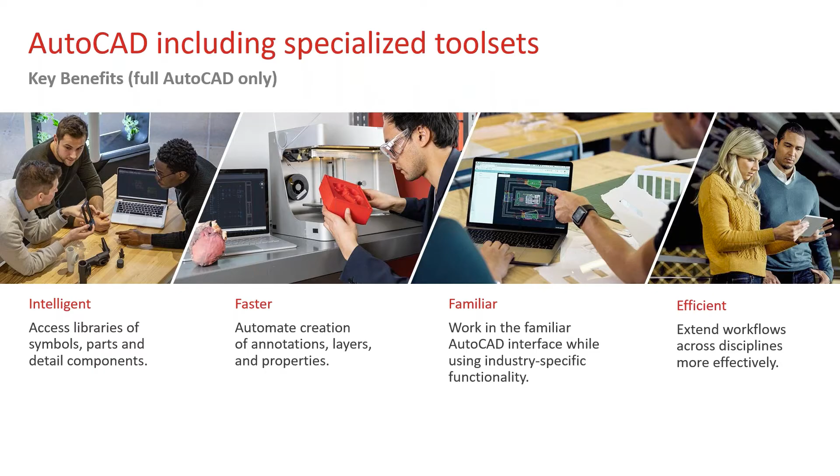You still get all of the usual subscription benefits. So you subscribe to AutoCAD and obviously AutoCAD LT, and you would get all of this for your flexibility and support. So you get the technical support, so you can talk to support specialists, get remote assistance, online resources as well. The software stays up to date on your subscription, so you get instant access to the latest features, any upgrades to new versions, and so on.

One of the major benefits of the subscription is the flexible term lengths. So you can use the software for as long as you need it. You might have a specific project that needs the mechanical toolset. You can use it for as long as you want to with your subscription, so you can go from 1 month up to multiple years in that specific subscription if you need to. And of course, you've got the admin tools there as well.

So you can manage all your software licenses, your seats, your usage. As an ex-CAD manager, I wish I had the administrative tools that we have now, because it would have made my life probably about 200 times easier. But that's me going back and showing my age a little bit there. But the technology now with the administrative tools is just so much easier to use. It's really easy to manage those software licenses.

Now, we're talking about the mechanical toolset today. We did a productivity study a little while ago about productivity gains in the mechanical toolset. Now, you'll notice there's a little asterisk right there after toolset in the slide. If you look down at the little caveat at the bottom, that's compared to basic AutoCAD. So we're getting a 55% gain over basic AutoCAD.

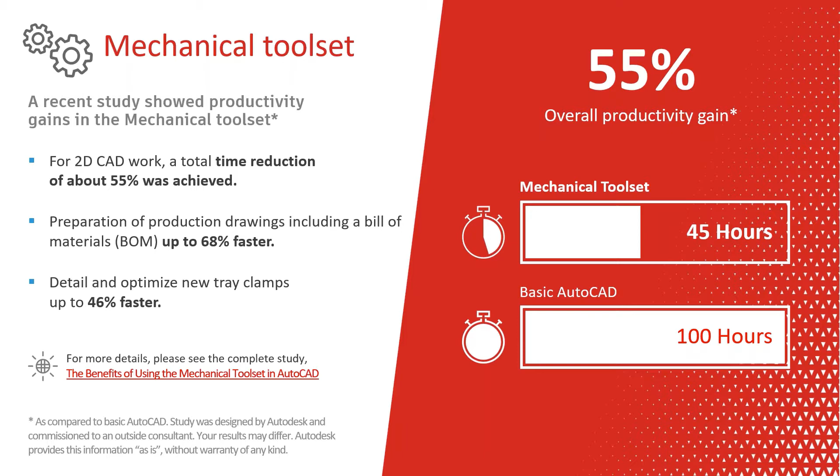So again, I'm talking about the caveat there. If you were doing something a lot more detailed, you might get a better or lesser productivity gain, depending on the actual subject matter that you're working with. So just be aware of that. We're saying it's an overall productivity gain of 55%, and that may differ depending on what you're doing.

Also, preparing production drawings for assembly, you want to make sure that you've got a parts list, a bill of materials, so that when they go out to assembly, everybody's got everything to build what they need to build. We're also going to look a little bit at how we communicate design intent with our production drawings. The one thing that we are aiming to do here with the mechanical toolset is communicate that design intent. So when it leaves our CAD office and goes out to the people that are going to manufacture our design, they know what to do with it when they put it into production.

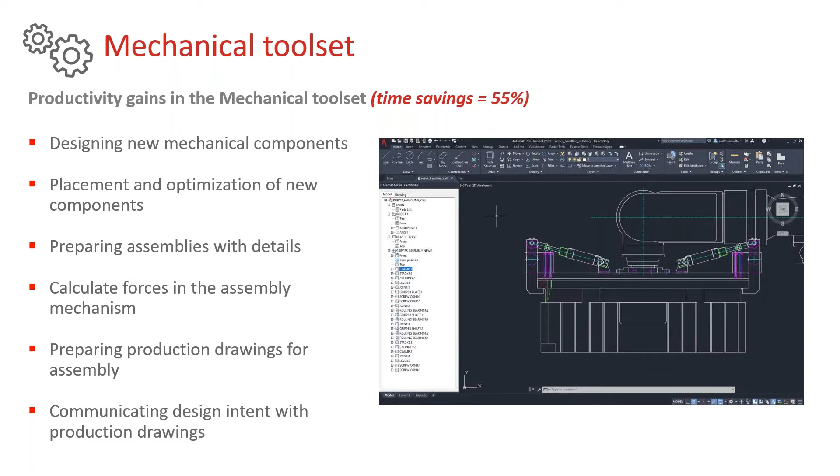So let's get going now. Let's move into what we're going to talk about. And the first thing we're going to look at is designing new mechanical components. Now, the time saving for that was approximately 45% in the productivity study.

I'm using a slightly different drawing; it's different to the one that we use in the productivity study. It's a little pump subassembly, and I really like this one because it gives you a good general overview of the mechanical toolset. Now, when you're using layers and properties in basic AutoCAD, it's not a difficult task, but there's lots of little manual things that you've got to do, and they can become quite onerous, but more importantly, time consuming. So what we want to think about here is, how does the mechanical toolset actually speed us up, so to speak? Now, these little videos, they're pre-recorded, so I'll just talk you through what's going on.

So we'll start the video off now, and you can see we've got the sub-assembly there, and I'm just moving over now. We've got the mechanical browser. Now, the lovely thing about the mechanical browser, it's a palette. You can auto hide it on the screen if you need to. And the nice thing about it is it lists all the parts that are in your sub-assembly, in this case, the little pump sub-assembly. And the benefit you have there is all these parts are stored in a content library.

And when you're working with the layers, it's a very different layer manager. You'll notice in the layer manager there, we've got different colors, different line types that are specific to the standard that we're using. We've also got, if I slide along there, associated objects. And you'll notice the mention of the word contour in places there. Contours are used in the mechanical toolset, and what they do is you'll pick something like a hidden narrow line type or a center line, and it will automatically place it on a known layer. And that's the major benefit of these contours, it automates those layers for you. And that means that you don't have to think about it. You know it's going on the right layer straight away.

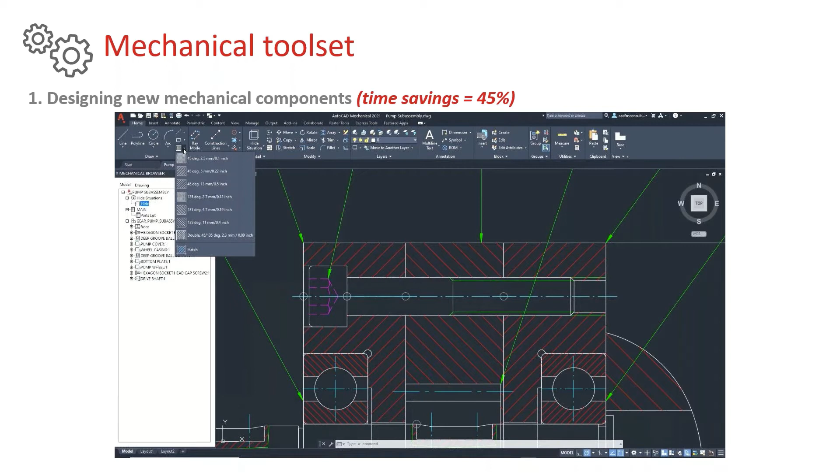In the annotation here as well, you'll notice in the text, based on the standard we're using, we've got different multi-line text at different heights. So I don't have to go in and set the height or set the text style height at all. I can automate that, and I can say that I want it that height. If I go back to the Home tab, hatching is similar. I've got different hatch patterns preset already with my standards that are driven in the mechanical toolset drawing. I can still hatch normally though. You'll notice there I can still pick an internal point and hatch if I want to. Nothing to stop me doing that whatsoever. So the whole idea there is that all of this detail is quick and easy to work with. And it's just a great tool.

And I love the mechanical toolset because there's so many things in here, like center lines. You can have center lines in so many different configurations. You don't get that in regular AutoCAD, but I wish it was there. It would make my life so much easier in regular AutoCAD if I had all these different center line configurations to use, especially when you're drafting simple things up and you need a center line cross in the corner of a polyline, for example.

Other things available as well are your construction lines. Your construction lines are fantastic. You've got so many different types. In regular AutoCAD, you've got 3. So you can see the difference there in the mechanical toolset. And they're brilliant for transposing different views. At the moment, we're looking at a side view of the subassembly, and I've got all those different construction lines there that allow me to create contours and construction lines to develop different views of the subassembly that I'm working on. I can delete them all as well, you'll notice there, and there's some extra ones if I go to the flyout there on the construction panel as well.

Now, you've got your hidden lines as well. There's all different hidden lines that have numerous configurations in there as well, and allow for different scales and proportions when you're detailing in the mechanical toolset. And you'll notice there we've got the bill of materials and we've got the little green balloons there. Those balloons are a standard revision, you'll notice there. They work to a specific standard. So the diameter of the bubble, for example, is a specific size. The arrowhead is a specific size, and it does all of that automatically on the appropriate layer for you at any given time. So you don't have to think about which layer does that go on? What diameter does that bubble need to be?

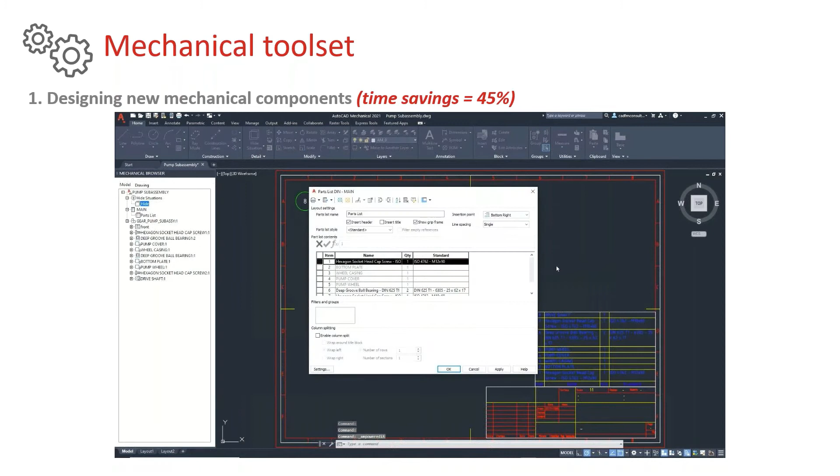You don't have to think about it. And you've got your parts list there as well. That is automatically added when you work from the bill of materials. So there's my parts list, and I can go in and edit that, edit the configuration of the parts list. I can also go in there very quickly and just quickly edit the attributes of my title block. Again, that's all attribute driven.

So you can see there I've got a standard DIN title block, and you can see I can go through all my tags there, my attribute tags, and make sure that I'm communicating the appropriate information on the drawing. It's that quick and it's that easy. And this is what I love about the mechanical toolset. It's taking all of that donkey work out of the drafting and allowing you to concentrate on the design.

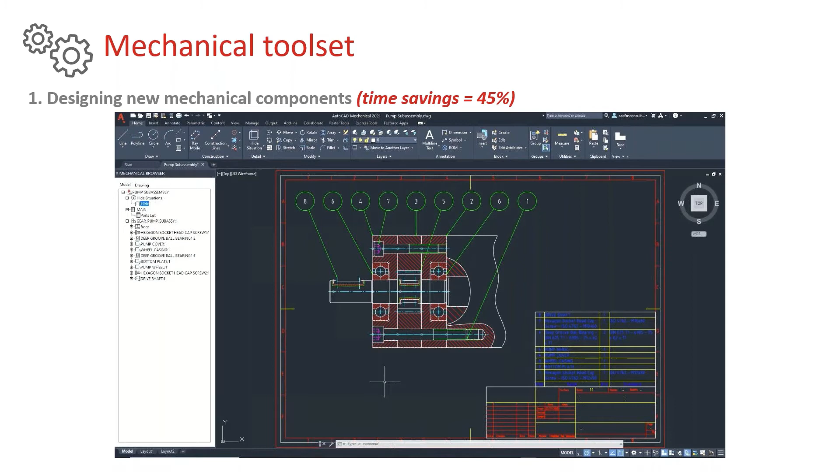Okay, moving right along now, what we'll do is we'll jump into how we detail and optimize new components. So we've got lots of different commands that allow us to enhance the basic AutoCAD drafting. So on one hand, you're saving time here, but on the other hand, you have easier access to commands now that you might not know about.

So you've signed up to your AutoCAD subscription and you've loaded up the mechanical toolset, but you're used to regular AutoCAD. So when you jump into the mechanical toolset, you might find commands that allow you to work much smarter, much more efficiently. So there's numerous options for line, centerline, and rectangle creation, for example. So let's run the video and we'll jump into some of these now. And the whole idea of these is it gives you the ability to work in the toolset quicker and faster.

And I'm hoping that my crosshair will move soon. There we go, that's excellent.

So if we jump into the line command there, you'll notice you haven't just got the line command anymore. You've got symmetrical line, zigzag line. Zigzag line is great for breaks in a design. Different center lines that I mentioned earlier. Now, you'll notice that there's lots of different ones in there, but if I'm designing those 4 holes on that pump assembly there, I can actually place those 4 hole center lines just in one go, instead of having to draft them all up.

The rectangles, though, I love. I've got so many different configurations of rectangles I can work with. I can decide on what size I want it to be, where the midpoint is. I can do the same with squares as well. So they're equal-sided rectangles, you might say. So the tools there are so quick and easy to use.

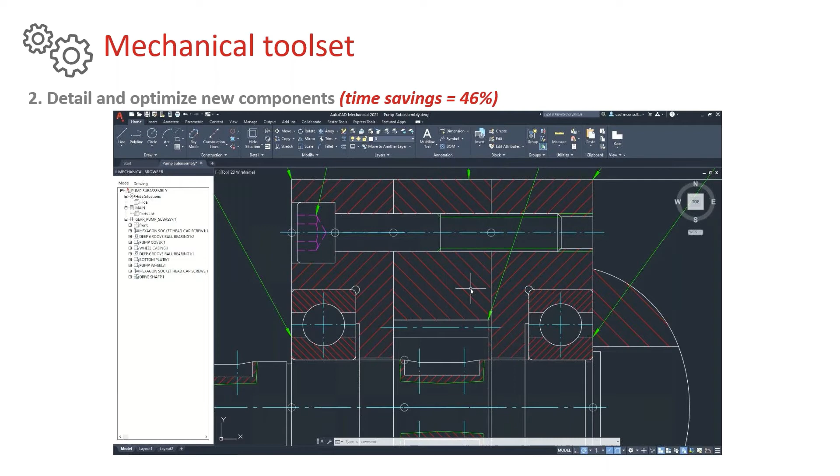Now, you've got some nice tools here when you're dimensioning as well, your annotation. One of my absolute favorites is the power dimensioning in the mechanical toolset. So if we jump into that a moment, and I'll specify my origins like you would for any regular dimension, and I'll just click there. And as soon as I click, it doesn't just place the dimension. It places the dimension as if I'm going to be using the DDEDIT command. So I can go in there, I can edit, I can take away the actual dimension value, or perhaps add my own information as well.

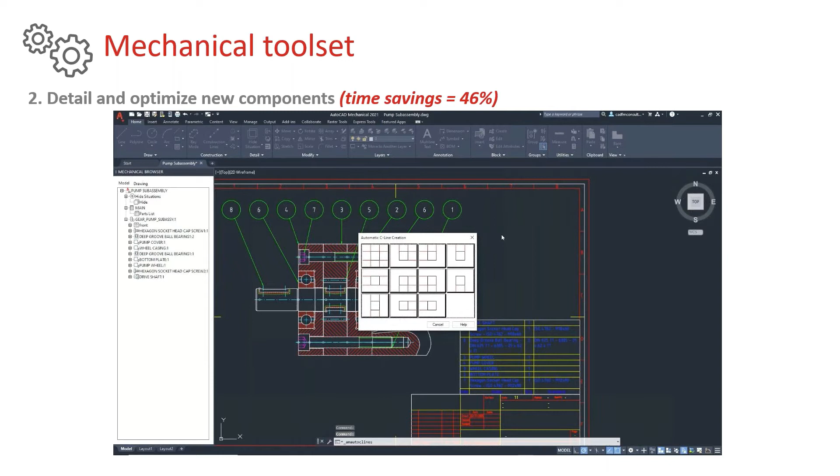Now, I did mention about construction lines as well. Construction lines are amazing as well. Now, we've only got the one view here on the drawing, but we might want to edit this and expand and have some different views of the pump subassembly. So you've got automatic construction line creation based on a specific configuration.

So I'll pick those 2 lines there and quick enter after selecting them. And there's my construction lines in place straight away. So I can place that view over there to the right, maybe use a bigger title block and expand my drawing as well.

So it's just incredibly easy, really fast and quick to use. Now, I want to show you the hatching as well. The hatching's really clever because I can pick just a standard hatch pattern. Now, I'm going to show you a really good mistake that people often make. Make sure that your hatch boundary is closed before you hatch. Otherwise, you get that kind of issue.

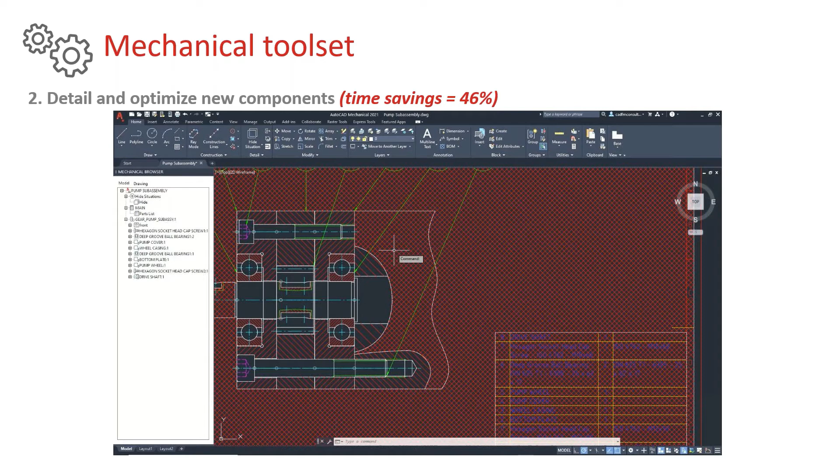But the hatch pattern there was preset, so it was all the right size on the drawing. If I come in here, though, let's perhaps hatch that area. And again, the hatch pattern is the right size, the right angle. It's automated. I don't have to think about it in my hatch command. It's already there and ready to go because I've got a standards-based list of hatch patterns to use. So really quick and easy.

And to optimize your design, you then don't have to think about all of those variables behind, say, your hatch pattern, your dimensioning, your construction lines, and so on.

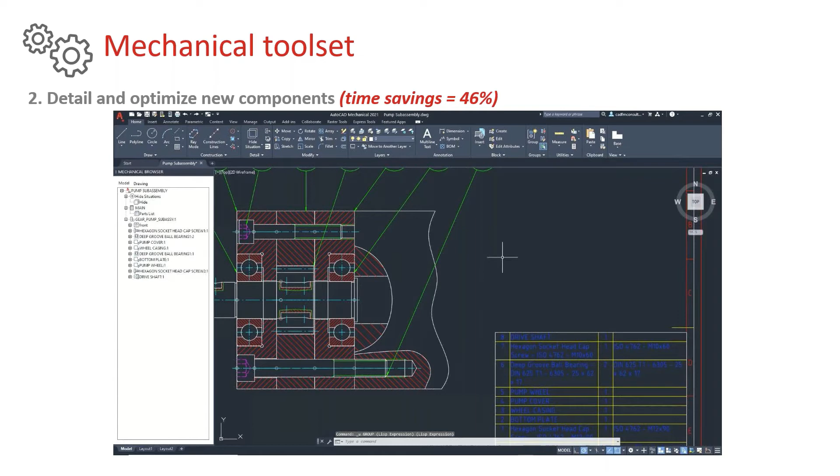We're now moving into the 3rd video of the series in this webinar, and we're going to take a look at preparing our assembly with detail views. And you can see there's a fairly significant time saving there of 86%. Now again, remember that caveat, it might not be exactly 86% when you do it. It might be more or less depending on the complexity of your design in the mechanical toolset.

Now we're going to be working with the robot handling cell with the robot arms again. And what we're going to look at is how we set up detail views that have different properties. We're talking hidden detail, solid lines, line types, etc. Now, in basic AutoCAD, there's a lot of manual work for that, and geometry manipulation is needed to accurately represent the objects that are partially or completely hidden.

So you have to create separate views of, say, hidden detail and maybe not hidden detail, just to make it really simplistic. But the benefit you've got with the mechanical toolset is you don't have to do that. Obviously, when you're doing this in basic AutoCAD, it's really time intensive and tedious, and it reduces any time available for mechanical design. And I've been there when I want to hit a deadline, having to create different views in basic AutoCAD.

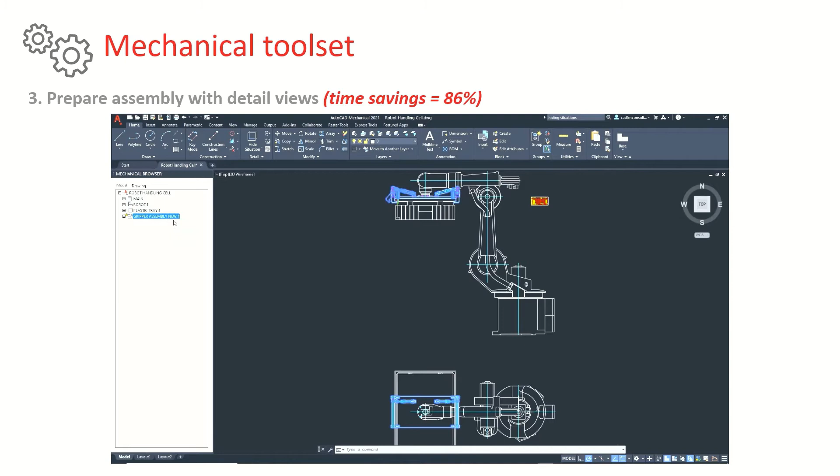So how does that work in the mechanical toolset? Well, let's zoom in and have a look now. I'm looking at the gripper assembly part of the robot arm. So we're going to zoom in. You can see the box there with the vertical lines, and the robot arms are clamped in, holding that box up at the moment with the clamps.

Now, what you create in your mechanical design in the mechanical toolset is what they call a hide situation. And the hide situation basically has different properties. So you go to hide there, it's in the detail panel on the home tab on the ribbon, and you create a new hide situation with your hidden detail, your center lines, your continuous lines to represent the view at the front, so to speak. But if you want a view at the back, you can go in and work with these details and give them different properties. So you might have dashed lines to represent hidden detail instead, for example.

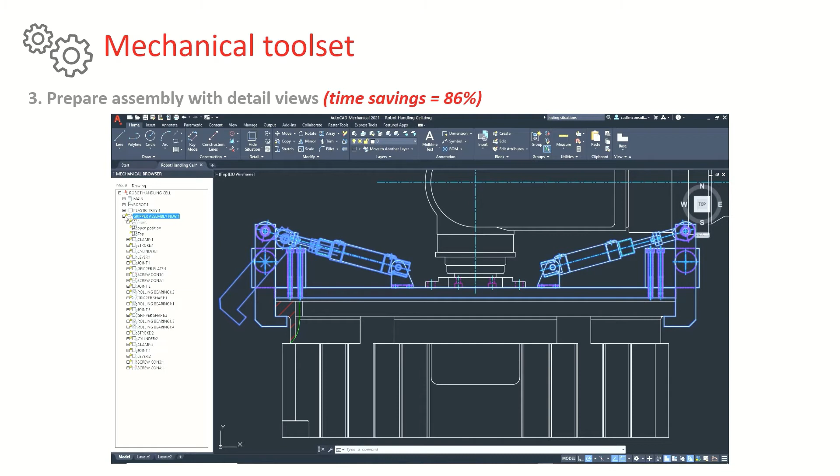Now, what I'm going to do here is go into two of the hide situations I've created for you. So we're in the gripper assembly, which is highlighting in the mechanical browser there. I'm just going to expand that out and look at the front view. And you can see I've got some hide situations there. I've got two, and it's basically the left-hand robot arm and the right-hand robot arm. And I've set those up and they're really basic and simple.

But I'm going to use the edit tool to edit the hide situation so that I can show you the difference between a hide situation and a regular. So it's sort of front and back. It's a bit like draw order in other Windows-based applications. So there's one there. And you can see the hide situation automatically puts that to hidden detail. If I go to the next one, again, you can see another hide situation, and you can see I've created some different ones there just around the robot arms in the gripper assembly in the design.

And the whole idea of these hide situations is it allows you to highlight elements in the drawing itself. So I go to the hide situation, I right click on it and I highlight, and there you go, it highlights it in that view.

Now the benefit I've got there is if I want that view to be part of a scaled viewport to communicate my design intent in a drawing, I can utilize that. And again, I can highlight again, and you can see the hidden detail just pops up. And what it does is it's two different views of the same object, but you're looking at them in different locations, sort of front and back, or one at the front and one behind it.

And that's why these hide situations are so useful, because it basically allows you to not have to do all that work that you might do in basic AutoCAD. You can see there that I'd have to create two separate views, one with hidden detail and one without, in basic AutoCAD. But as you can see with the hide situations in the mechanical toolset, it automatically highlights those two different views.

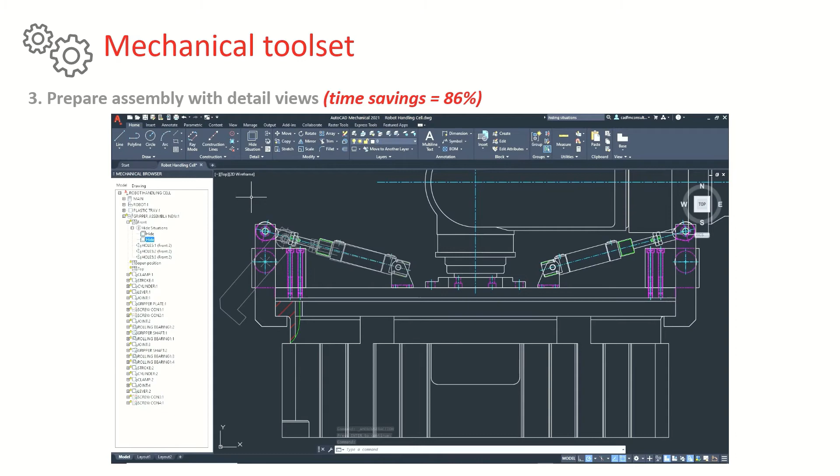So this is another really fantastic tool in the mechanical toolset. It allows you to calculate the forces in the mechanism itself. And we're going to zoom in on an area in the drawing where we can actually calculate some forces. Now, there's a little hatched area in the top view of your robot arm. You can't see it at the moment, but hopefully we'll zoom in shortly. But the idea is we're going to jump into this robot handling cell and make sure that we calculate our FEA, our finite element analysis.

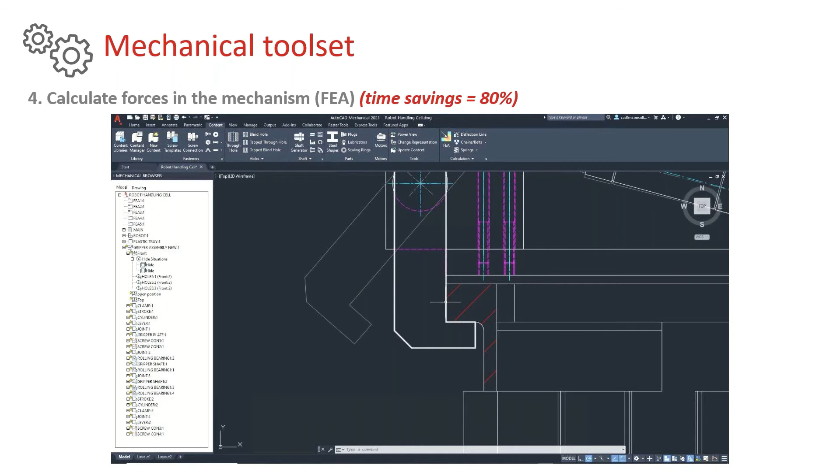So when we zoom in, we're going to get in nice and close, and it's that little hatched area there. And we need to zoom in a lot here because this is quite a small part of the design. But I jump to the content tab and I can run there my finite element analysis. And what it asks me now is where am I going to highlight to calculate? So I pick a point, a bit like if I'm hatching, and then I get the calculation dialog box up here. Now I've got to add my loads, I've got to add my supports here.

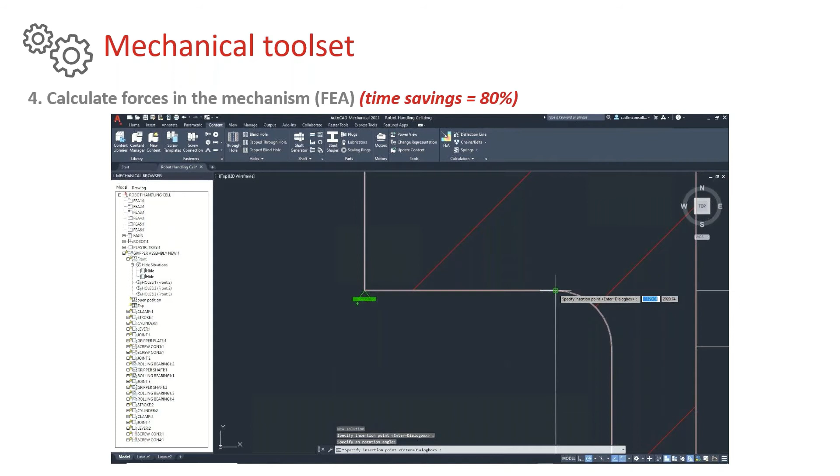Now, some of the values I add, just ignore them because I'm just showing you the workflow here. They wouldn't really apply in real life. So there's one of our supports, supporting that little edge that's bending round at the top of our mechanical design. And I'm going to place another support there. So this is sort of a lip coming off of the edge of part of the robot clamp that we've got.

So what I need to think about now is where is there going to be a load bearing down on those supports? So I'm going to place a load, and again, a little bit of zooming and panning. Just going to place a load on that corner there as if it's pushing down on the top edge of our little robot clamp that is working with our robot handling cell. It's like a crane that lifts boxes. So there's a load there, and I'm just pushing it straight down, and it's 1,000 newtons I've put in there. Now that value might be totally random. It might not actually work.

Now, bear in mind we're a 2D drawing, so we need to give it a thickness of material to calculate with. So I've put 25 millimeters in there for now. And I'm going to click on the visual results. There's all different results you can get, but if I click on the visual results there, I can have something like a von Mises stress diagram. Now, you may remember those with all the nice pretty colors. You can also have lines, so you can choose which one you want. I like the colorful one.

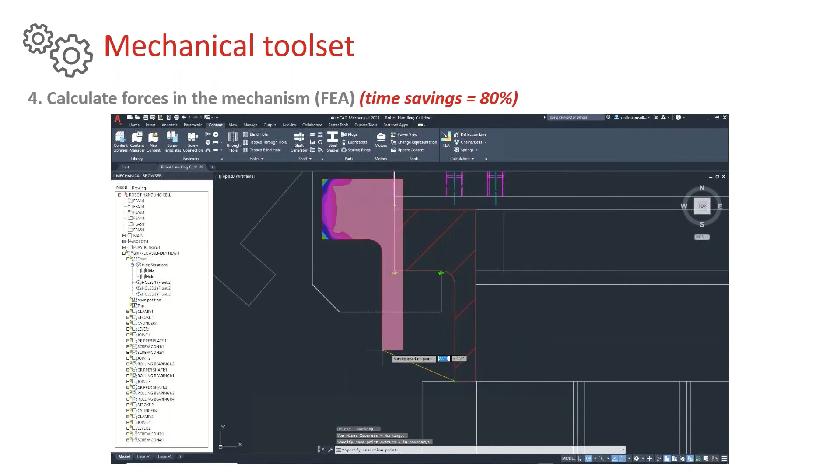And it calculates it for me. So all those different colors now represent the stresses and strains on that particular part of my robot handling cell. I can now drag that away from the design, click in an area of the drawing, put my legend there as well, click again.

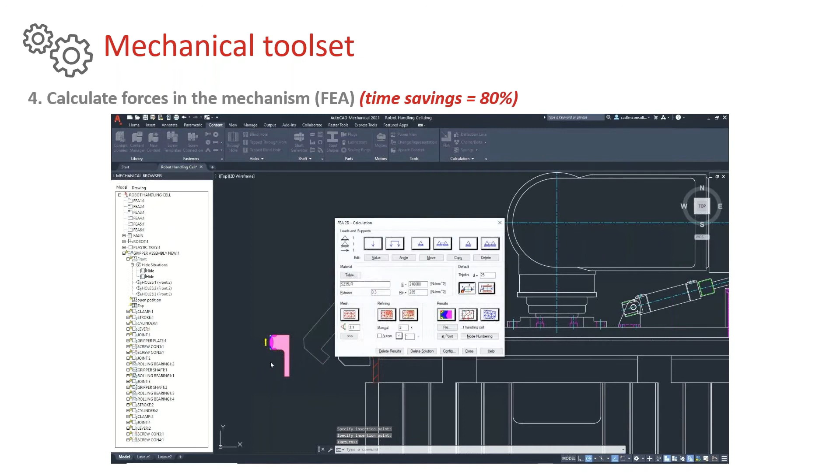I might want to scale that up a little bit, make it bigger. And then it takes me back to the dialog box. And if I zoom in real close now, look at that. It tells me all the different values that all those different colors represent. You can obviously see that the major part of the stress and strain there is pushing down on that corner where that 1000 newtons is pushing down. And that's also kicking in on the bottom sort of right corner there to the left as well.

But the benefit you've got there is you can do a quick finite element analysis of any mechanical design, which means that you can almost non-destructive test it there and then. It's not a perfect science, but at least it gives you a good idea of what you're designing is potentially going to work as you go through all the different design phases.

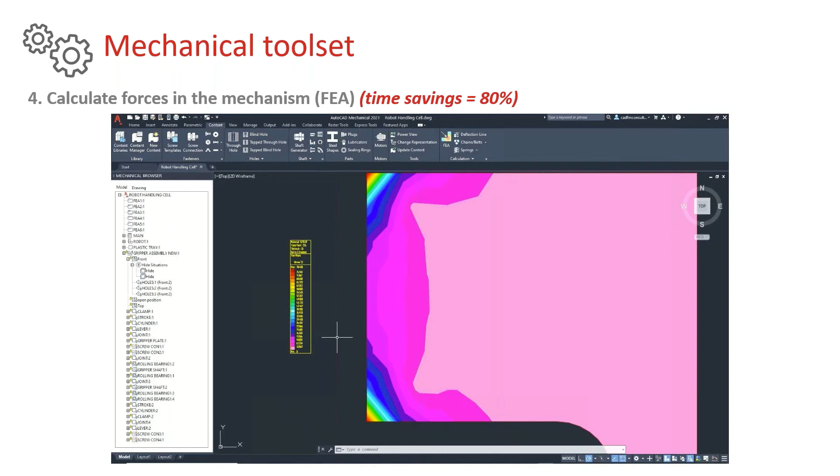Now, we're jumping back to how we prepare production drawings now for an assembly. Now, this is where you start thinking about your bill of materials. Your bill of materials gives you a time saving of in the region of 68%. Now, don't worry about all the different time savings because I do kind of overview those towards the end of the presentation anyway. So we're back to our nice little pump subassembly.

Now, I like this one purely because it's a nice, simple little design. You've got a parts list, you've got a bill of materials, not too many objects, and it's really good for showing you the overview of how the bill of materials works in the mechanical toolset. Now, the good thing is once you've created your bill of materials, it stays there in your mechanical design in the drawing. It's always there.

And if you add other parts to the drawing and the design, it will update the bill of materials and the parts list as well. So you don't have to think about that too much. So when you're preparing these production drawings for assembly and you suddenly get a sudden, oh, I need to change that or I need to add a component, it will automatically calculate that for you, add it to the parts list and add it to the bill of materials. So let's run our little video and we'll see how the bill of materials works.

And the whole idea of the bill of materials is it's actually allowing you to work with all the information, all the content libraries that you've got in the content tab on the ribbon as well. So you've got support there for multiple parts per drawing, collapsible assemblies. You can automatically recognize your standard parts because they're already in your libraries. Change your design once, the updates go through the entire drawing, keeps everybody on schedule, and it also reduces any costly stops in production from an error as well.

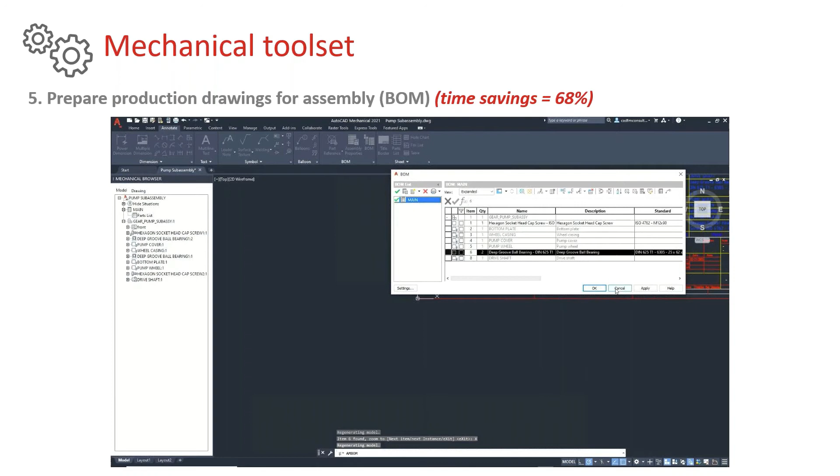And I can export out, like I said earlier. There's the report generator. I can generate a report. I can export out to, say, an Excel spreadsheet format or an MDB format there. And the information can go out to other people if necessary as well. It's really, really quick and easy to use. And I just cannot believe that it's not used more, because the tools here are just so fast.

And you'll see that I'm going into the parts list now, and it's asking which BOM, bill of materials, do I want to use. So I'm going to use the main one again just by pressing enter there. You can see it on the command line, and I can right click and select it on the shortcut menu. And there's my parts list again. So the information's there. I've just got to say, okay, I want a parts list off of the bill of materials, and there it is in the drawing. It's that quick and easy.

And the benefit you've got there is, imagine having to set up all the AutoCAD tables in basic AutoCAD to do all of this. It would take so much time. And what I love about it is it's just there. I just click and it's there. The parts list is there, and it relates to that bill of materials that is all automatically assigned to my mechanical design.

Okay, last but not least, let's hope the PowerPoint's going to behave itself again. There we go. It's the same drawing, still the pump subassembly, but I'm going to show you now just some really nice little features that are available when you're preparing your production drawings. So again, a time saving of approximately 62%.

Now, in newer versions of basic AutoCAD and also the toolsets, you have a lovely feature now with the blocks palette. The blocks palette allows you to quickly and easily add blocks to your AutoCAD drawings, but it's also got a lovely libraries function as well. Let me show you how that works. Just starting the video up there. And what we're going to do now is just pop over to the Insert tab on the ribbon.

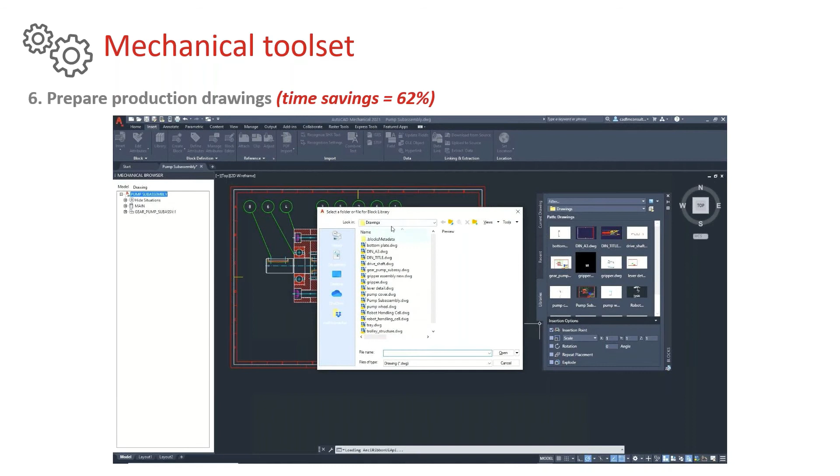You've got the blocks in your current drawing. You've also got the recent blocks that you may have used in AutoCAD as well. So when you click on the recent tab, those are all the blocks I've used recently. So we've got some chairs and things in there that I've had in other drawings. But the libraries, I just specify where I want AutoCAD to look, or in this case, the mechanical toolset. Now this is the same in AutoCAD and all the toolsets. So if you've got a group of blocks on a project, let's say the pump subassembly, and you want people to use them, there's my title block.

I can just drop that straight in. And there's my title details, which is the little bit in the corner there with all the information about the drawing. It's that quick and it's that easy. And I've got all the insertion options there as well. It doesn't take long at all.

So as you can see there, you've got the ability to bring blocks in. I'm using the title block, obviously, as an example, but it doesn't have to be a title block. It could be other information that comes into your mechanical toolset design. So that's a really nice little feature there that's available.

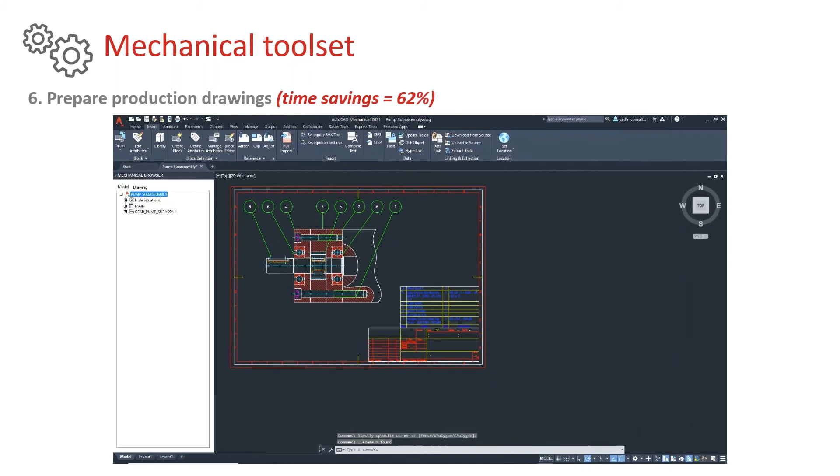Let's zoom extents now. And I'm going to say to myself, okay, it's Friday afternoon, and I've got a last minute grub screw that I need to apply to that shaft on my pump subassembly. So I go into content. I'm now in my content library. There's my screws. I'm going to pick a specific type. Let's go for a countersunk head. Obviously, it's a grub screw. You don't want it catching on anything. So I'm going to go for the slotted flat countersunk head cap screw, that one there.

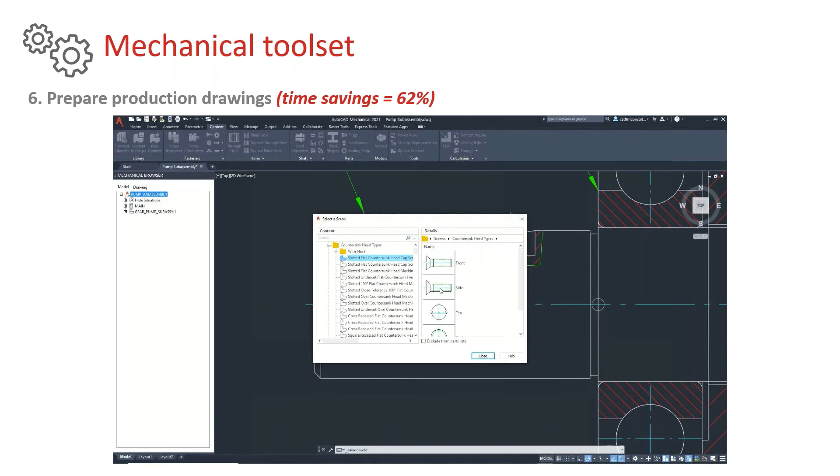So I select that in the library. Okay, which one do you want? Which view do you want? This is where the content libraries come into their own. It saves you so much time. There's so much information in the mechanical toolset.

So what we've got now is, I'll pick a point, just a random nearest snap there, and I'm just going to drag that horizontally. I want it going into the shaft, off the top of the shaft there, and I pick a size. So I click on finish, and there it is there. Because it's from the content library and it's utilizing the dynamic block technology, I can pick the length and the part size, and it's just all menu driven. I just say okay to that.

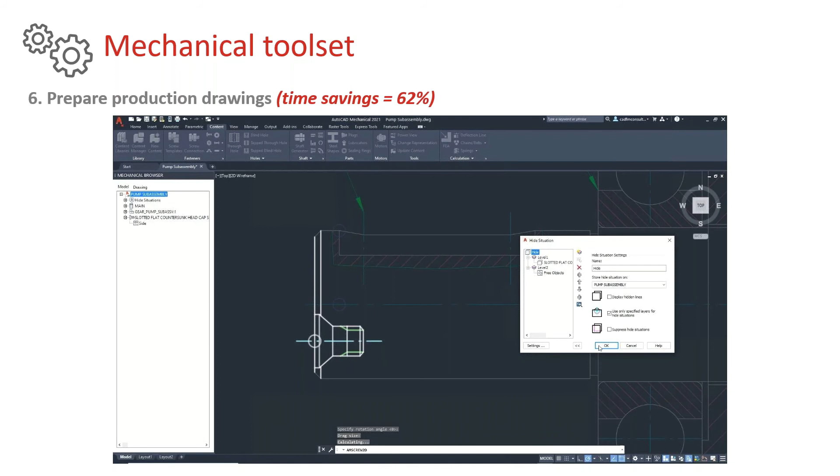I can add a hide situation. There we go, where our PowerPoint decided not to play. We're deciding on whether we have a hide situation, and it highlights in the drawing. I'm just going to say okay to that, and yes, we will have a hide situation. And you'll notice the line going behind the grub screw is now hidden, and that's what I'm talking about with the hide situations.

Now you'll notice as well, we have a new element now on our parts list in the drawing. Because I've selected that from the content library, it's automatically added that to my bill of materials. So when we go to the bill of materials now and just select the main one, I've now got a new item, item number 9, which is my slotted flat countersunk head cap screw. It's that quick and easy. And there you go, I can highlight it in the drawing if I need to.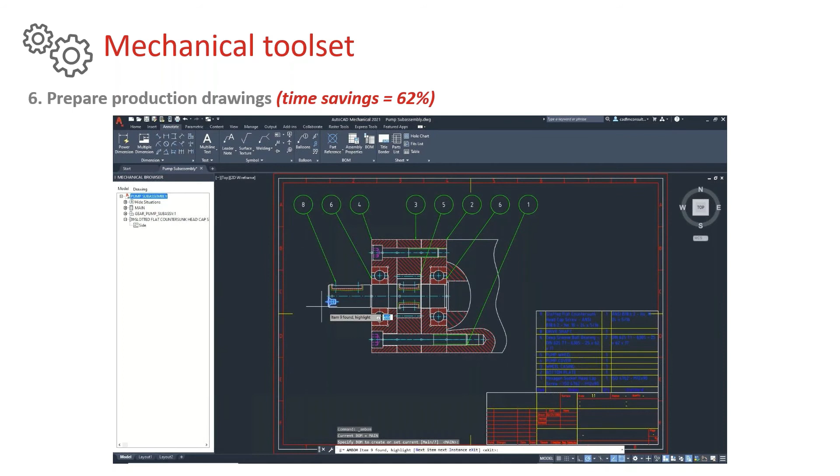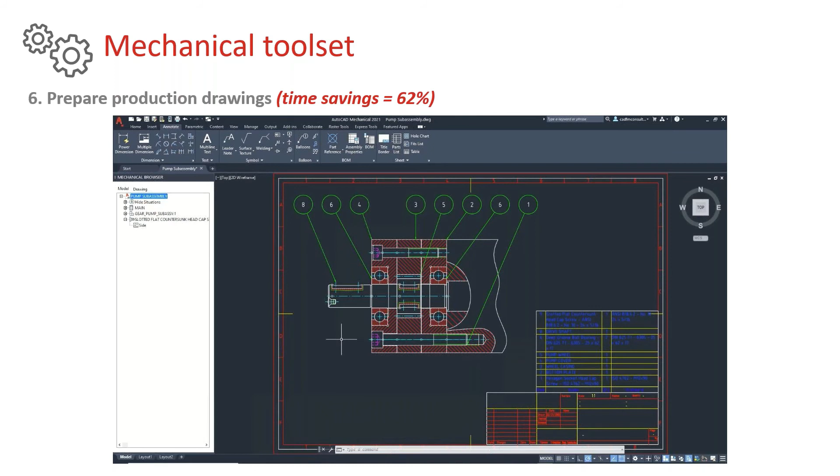Just saves a huge amount of rework and demonstrates exactly why the mechanical toolset is so useful for mechanical design. So that last minute change on a Friday has literally taken me a few minutes. Imagine the rework that would have taken in basic AutoCAD. Would have taken quite a while to do. So the information is there, content libraries are there, it saves you a huge amount of work.

Now that 55% that I talked about at the beginning, think about that for a moment. If you're working on a drawing for, say, about 4 hours in basic AutoCAD, you are nearly halving the time that it takes to create that drawing in the mechanical toolset. It's not a bad statistic when you think about it.

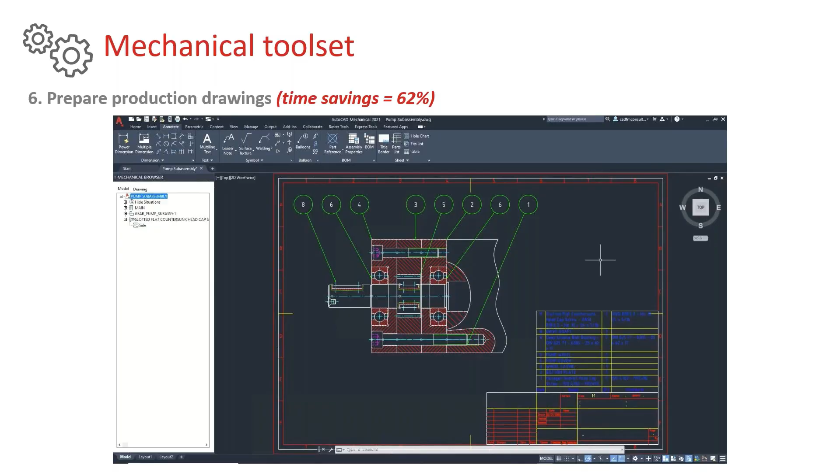Another thing that you have that is available across full AutoCAD, not AutoCAD LT, I hasten to add, but all of the toolsets, is the application programming interface. Now, a lot of the things that you've seen in the videos are all based around the API. And the other thing that you get with all the toolsets is the app store as well. So all AutoCAD toolsets offer an application programming interface.

You can see it there. It's that little box top right with the load application, run script, etc. The applications panel on the AutoCAD ribbon. So what that allows you to do is use user programming to automate tedious time-consuming tasks. That user programming allows you to then develop apps that will benefit the AutoCAD toolset users in your team.

Those apps can also be purchased in the Autodesk App Store. You can see that there, the middle graphic. And also, once you've got those apps loaded up, you can potentially go into them in AutoCAD. You can see AutoCAD 2021 there at the bottom with the connection to the App Store. And you also get highlighted apps sometimes that pop up in your featured apps tab in AutoCAD and the toolsets as well.

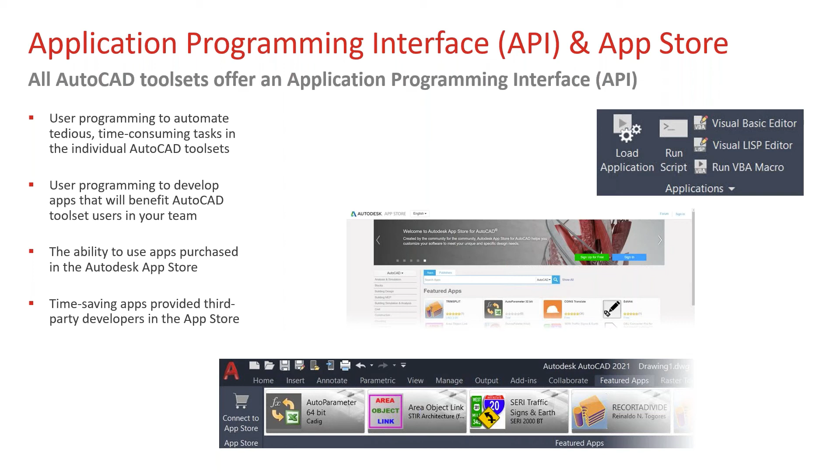So let's have a little look now at the mechanical toolset and the overall time savings. Let's have a little look at the numbers here. So these are our 6 tasks that we went through, PowerPoint permitting, I hasten to add. But if you look at them, these are the values that came out of our productivity study when we worked on it with the robot arm.

So you've got an idea there now of how long it takes in basic AutoCAD and how long it takes in the mechanical toolset. So you go from 136 minutes, which is 2 hours, 16 minutes, to 40 minutes and 30 seconds, just to give you an idea of time saving. And that is compared to basic AutoCAD. The asterisk is there, the caveat is at the bottom, because we're providing this information as is without any warranty, because obviously it depends on the detail of your task, the detail of your project.

But the idea is that the mechanical toolset will save you a huge amount of time. And that's the whole idea of these toolsets. We don't want you struggling with basic AutoCAD. Basic AutoCAD has its place. It has done for many years. In fact, if I remember rightly, I think basic AutoCAD turned 39 this year. So it's been on the block for some time, and it still gets used for lots of regular AutoCAD drawings.

But if you want to work with mechanical and mechanical design and production, the mechanical toolset is the way to move forward. As you can see, the time savings are there. You cannot miss them. And I've shown you some neat little tips and tricks, again, PowerPoint permitting, that allow you to work with the mechanical toolset. I've only touched the surface though. I really have only touched the surface. There is so much you can do with the mechanical toolset, and I just wish I had 2 or 3 hours to talk to you instead of the 1 hour on the webinar.

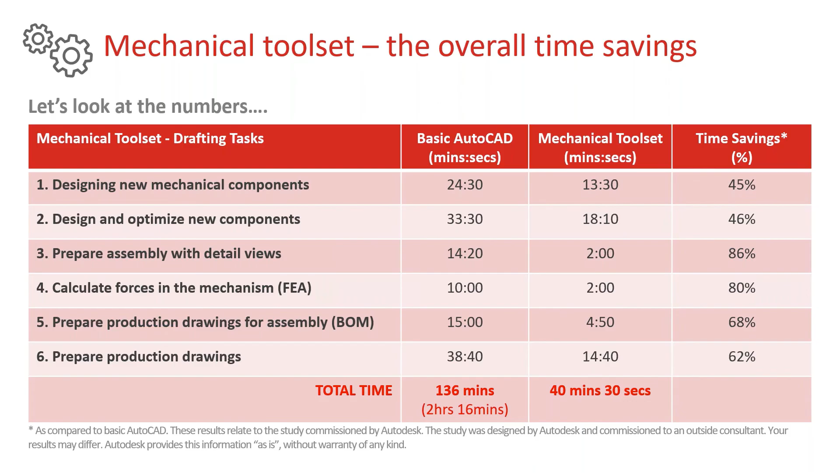What I do want to just mention here as well, I don't know if any of you attended AU 2020 last November. It was a very surreal Autodesk University because it was all virtual due to the world situation at the moment. I did a couple of classes. One of them was this one, which is understanding the new AutoCAD, the one AutoCAD with the 7 toolsets. And in my AU class, I go through how to implement the new toolsets, how to perhaps implement some training, how to get the software up and running within your organization.